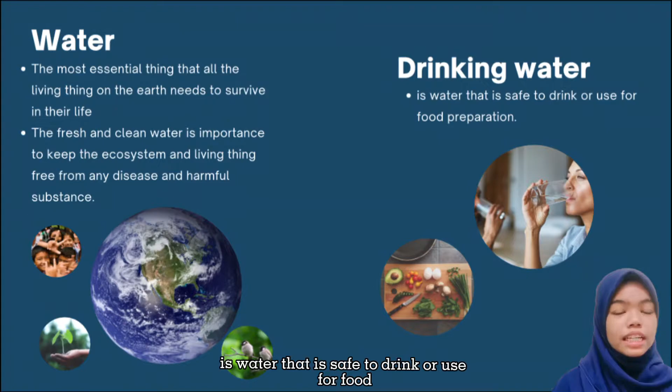Then, what is drinking water? Drinking water is water that is safe to drink or use for food preparation. Drinking water comes from a variety of sources. The most common sources of drinking water in Malaysia are tap water, bottled drinking water, and bottled mineral water. It is important to know where drinking water comes from, how it's been treated, and if it's safe to drink.

Malaysia is a tropical country blessed with abundant rainfall throughout the year. In Malaysia, water supply for domestic use derives 99% from surface water such as rivers, whereas the remaining 1% originates from groundwater. The surface water extracted from Sungai Langat, Sungai Selangor and Sungai Kinta in West Peninsular Malaysia is among the water supply most generally utilized for drinking water. On the other hand, states like Kelantan, Terengganu, Pahang, Perlis, Kedah, Sabah and Sarawak use groundwater as drinking water supply.

But how about wastewater? Wastewater is any water that's been used. That could be by an individual, a business or an industrial process like farming or manufacturing. Wastewater can be broken down into two broad categories, sewage and non-sewage. Sewage is wastewater that comes from domestic activities that includes houses, hospitals, public toilets, restaurants or schools.

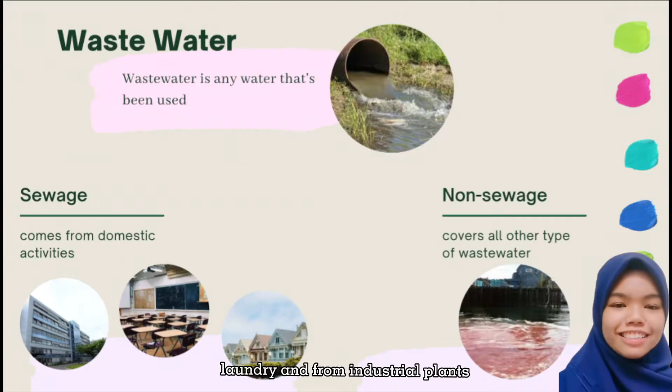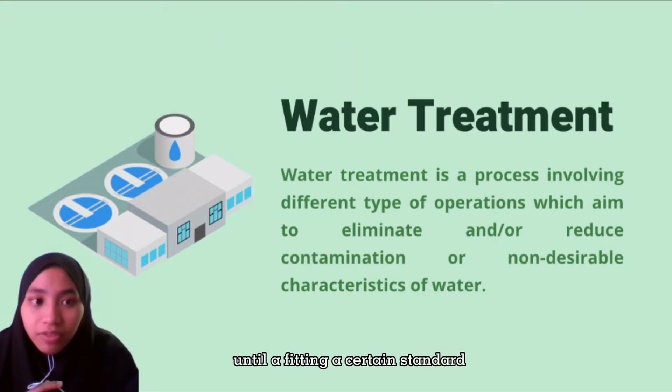What is water treatment? Water treatment is the process involving various operations to remove the contaminants in order to improve the quality of the water until it meets a certain standard. Why do we need water treatment? First, drinking water shortage. Although the surface is mostly covered by water, there's not much that is safe for drinking purposes and other purposes. It is said that only 3% of the water is fresh and suitable for drinking.

This situation has raised the need for water treatment plants to desalinate ocean water so it will reach the standard for drinking. This type of treatment refers to the treatment of saline water, which includes the distillation process and also reverse osmosis. Other than that, water treatment also provides a way to reuse used water, which clearly helps to overcome this problem. The water that is discharged from households and industry will be purified and introduced back to the community for reuse. And so it ensures that used water that can still be treated will not go to waste.

Next, access to safe and clean water. The water sources for our use are usually surface water, which is basically from rivers, lakes and ponds. As population and developmental activity increase, the cleanliness and safety of the water is doubtful. Using the water directly from the sources will very much affect human health. This is due to toxic elements from human activities and also from rainwater runoff.

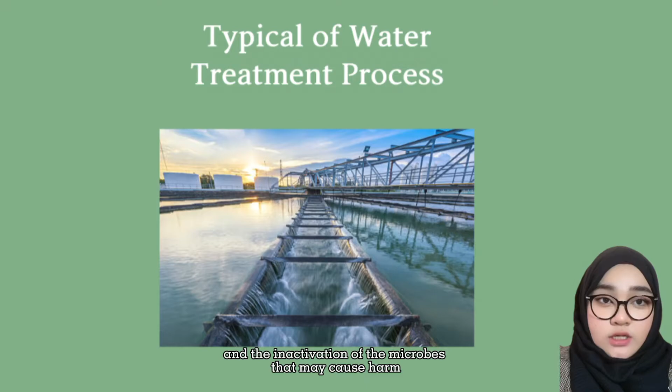Let's see the drinking water treatment process in detail here. First step is collection. The water is collected from the source like lake, river or reservoir. The water is to be transported from the source to the water treatment plant for the water treatment process.

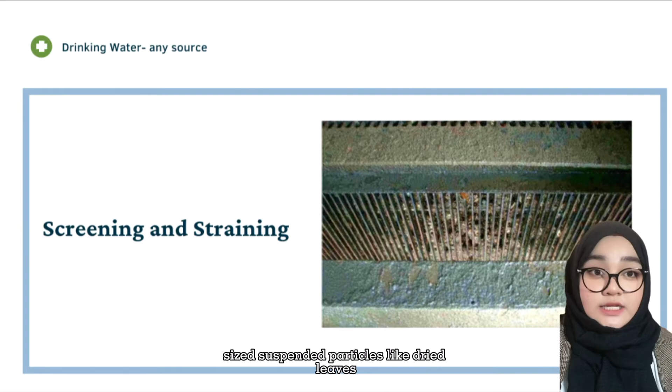Next step is screening. Screening is done to remove the floating matter from the water during the water treatment process. Surface water contains a large number of suspended particles, like dry leaves, pollutants, and others, that increase the unnecessary load on the treatment site. Next step is sedimentation and clarification. It is required to increase the efficiency of sedimentation as stated above during the water treatment process.

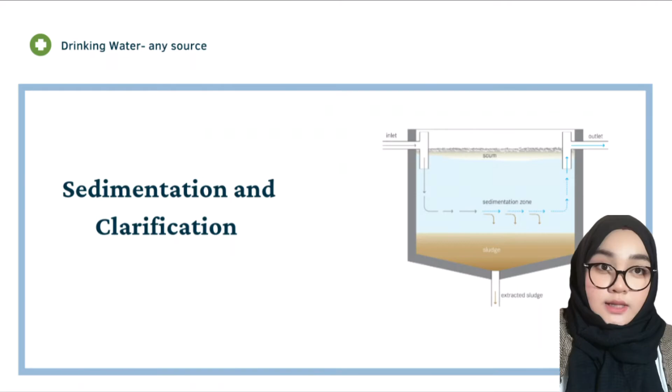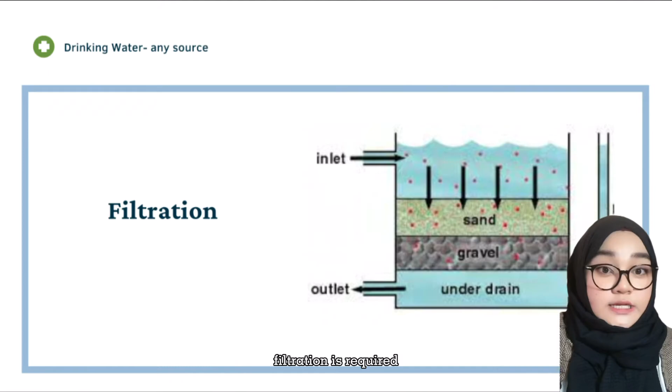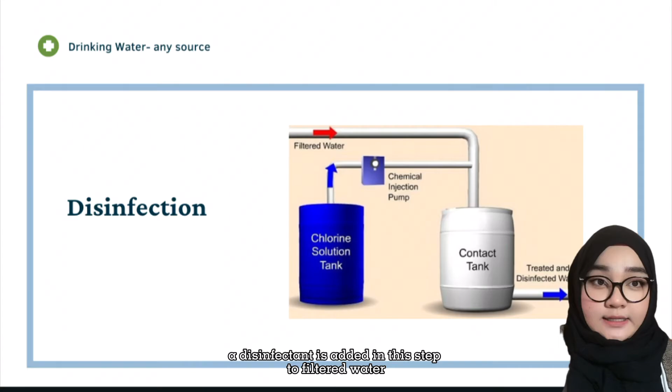Next step is filtration. Filtration is one of the most crucial steps of the water treatment process. The flocs are not removed entirely by sedimentation, hence to remove the finely sized particles and flocs, filtration is required. Next step is disinfection, the inactivation of pathogenic bacteria and other microorganisms that can cause disease. This step is essential to control waterborne disease. A disinfectant is added in this step to filtered water.

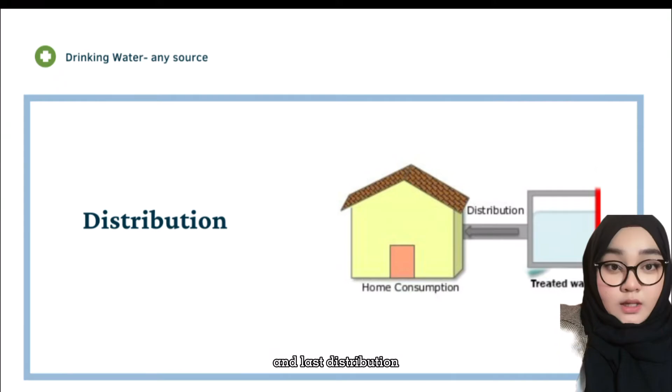Next step is storage. Once the disinfection process is complete, the water is stored. And last, distribution. The distribution system consists of large water pumps at the treatment plant and overhead water storage tanks.

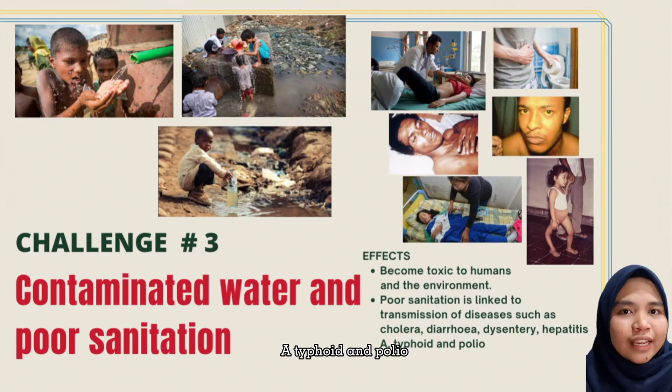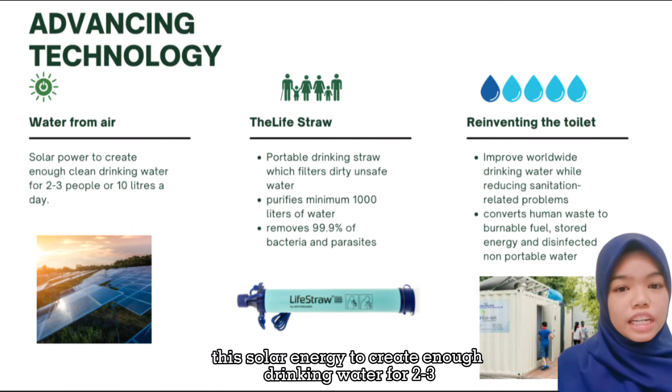First is the hydropanel, where solar energy is used to heat a sponge-like material to create water from air. This uses solar energy to create enough drinking water for 2 to 3 people, or 10 liters a day, while using renewable sources. Second is the LifeStraw. This portable drinking straw can filter dirty, unsafe water, purifies a minimum of 1,000 liters of water, and can remove 99.9% of bacteria and parasites.

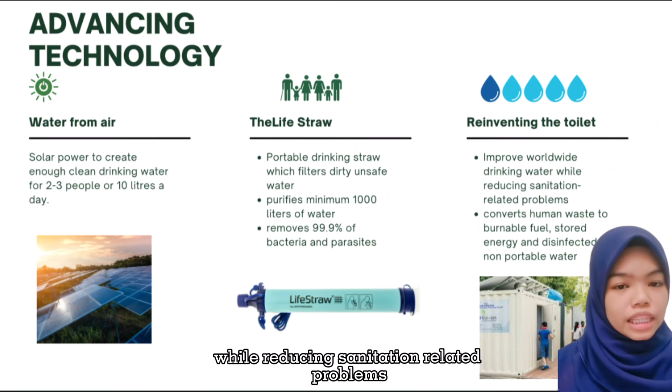Last is reinventing the toilet. This improves worldwide drinking water while reducing sanitation-related problems, where it can convert human waste to burnable fuel, store energy, and disinfect non-potable water. In these drinking water issues, we can conclude that having clean and safe drinking water is very important as it is fundamental to our health.

In order to have a good drinking water supply, we as a developing country should create new technologies that are long-lasting and environmentally friendly for our future generation. But while having new technology, the community should be concerned about environmental issues by spreading awareness and taking action to save the worldwide drinking water collectively.